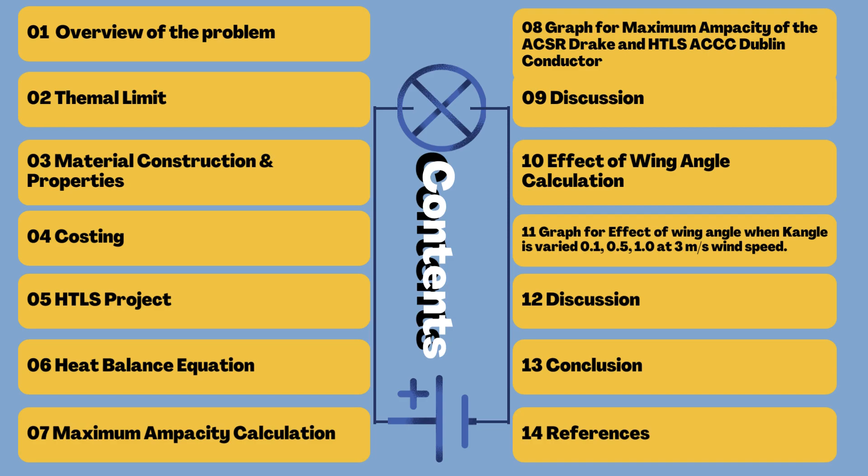As we know, electricity consumption in Malaysia is growing by around 6% annually, and this problem is straining the existing transmission and distribution infrastructure. Number two, overloading of transmission and distribution system. Expanding the transmission network has overloaded Malaysia's existing system, so the current infrastructure is struggling to manage the increased power flow to ensure reliability and stability, and there is concern about potential failures.

Number three, limitation of right of way (ROW). As we know, our country Malaysia has limited land availability and the difficulty of getting the required approvals and permission. So it is our challenge to build new transmission lines.

Okay, next I will present to you three different types of HTLS conductor available in our industry and how they are different from the ACSR conductor in terms of thermal limit, material construction, properties and costing. So for the first HTLS conductor, we choose ACCC, which stands for aluminium conductor composite core, that can operate at temperatures up to 200 degrees Celsius.

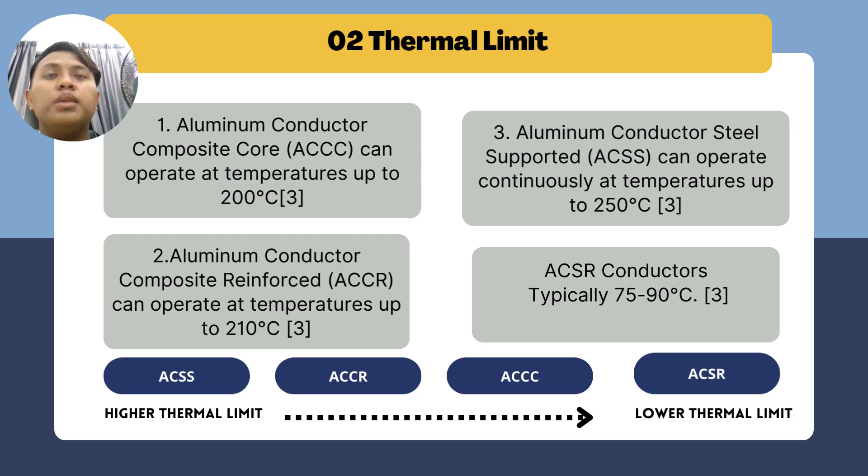So here is the ranking for each of the HTLS conductors compared to ACSR. The first is ACSS, at 250 degrees Celsius. Next is ACCR, third is ACCC, and lastly ACSR. So from this we know that ACSR has a lower thermal limit than any type of HTLS conductor.

Okay, next we will move to the material construction and properties. For the ACCC, the composite core is made from carbon fibers surrounded by a glass fiber matrix. And for the properties, ACCC has a very low coefficient of thermal expansion, so it reduces the sag at high temperature.

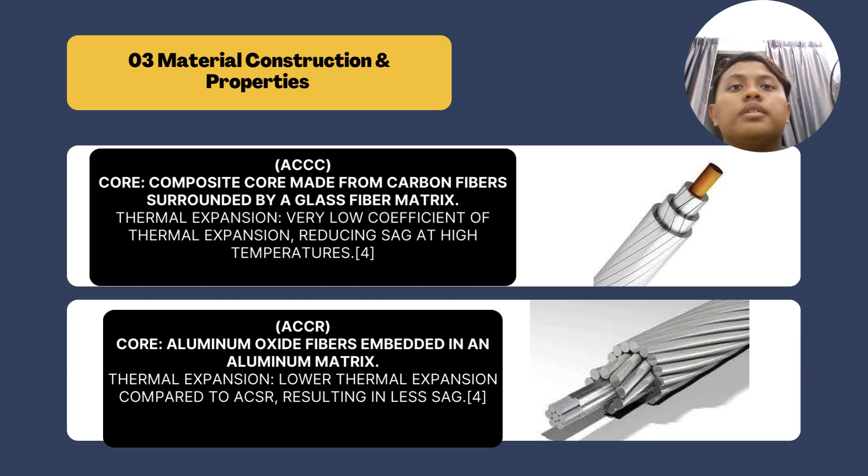Next, ACCR. The core is made of aluminium oxide fibers embedded in an aluminium matrix, and for the properties, ACCR has lower thermal expansion compared to the ACSR conductor. So this results in less sag for the ACCR. Next, we will move to the third HTLS conductor, that is ACSS. The core is made of steel similar to ACSR but with different properties. The aluminium strands are fully annealed, providing greater flexibility and resistance to thermal aging.

For the ACSR, the steel core is surrounded by aluminium strands, and for the properties, it has higher thermal expansion, which leads to more sag at high temperature, lower current capacity and higher weight.

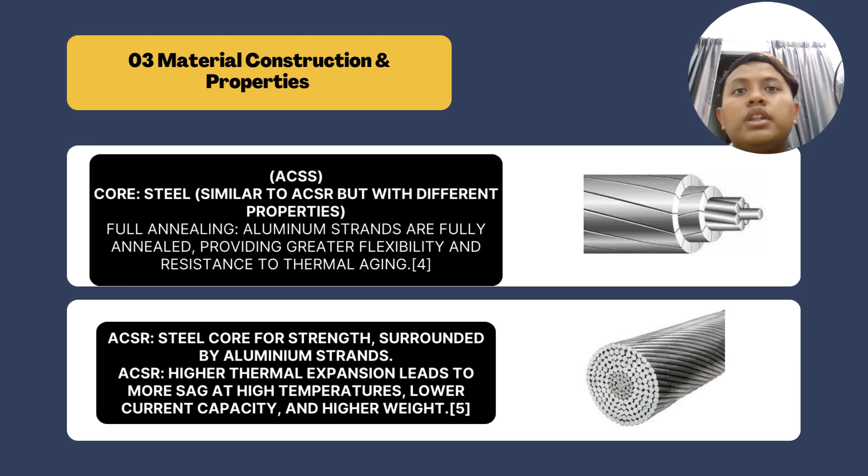Next, we will move to the costing of the three types of HTLS conductor and the ACSR conductor. For the ACCR, aluminium conductor composite reinforced, typically the range is $15 to $20 per meter. For the ACCC, the price can range from $3 to $4 per meter, for ACSS the price is from $2 to $3, and for the ACSR, $1.2 to $3.7 per meter according to the type used.

So from this we can see that ACSR has the lowest cost compared to the HTLS conductors. ACCR is in the first ranking with $15 to $20 per meter, followed by ACCC and ACSS, and the lowest cost is of course ACSR.

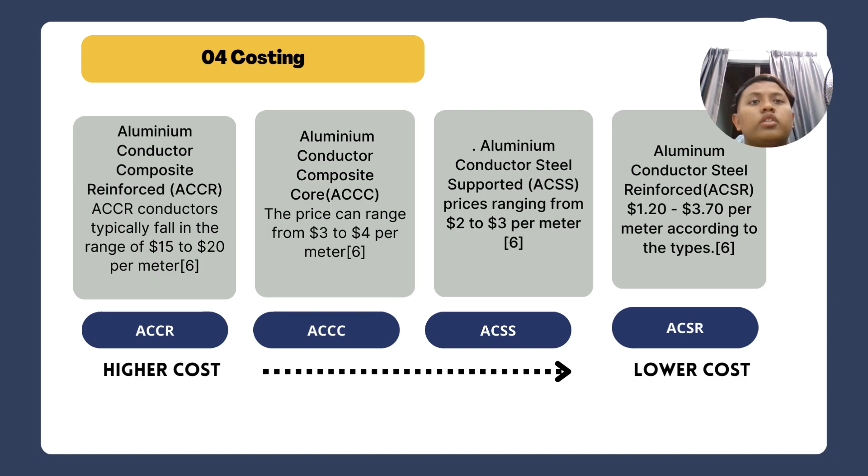So for the HTLS projects, I have chosen two: one example from our country, and one example in New England, United States. For the project in Malaysia, TNB has incorporated HTLS conductors in various projects to improve energy efficiency and transmission line capacity. One significant project involved upgrading the 275 kilovolt transmission line from Port Klang to Kapar. This conductor is used to double the line capacity without the need for new right-of-way acquisition.

And for the example of an HTLS project in the United States, the GSPL, which stands for the Granite State Power Link, is a project by National Grid to enhance power flow from Canadian renewable energy sources.

They use aluminium conductor composite core, that is ACCC, one of the types of HTLS conductor, to boost current carrying capacity with minimal sag. So it will improve the stability and efficiency in long distance power transmission. This upgrade enables better performance with reduced line losses, lower resistance and integration of renewable energy.

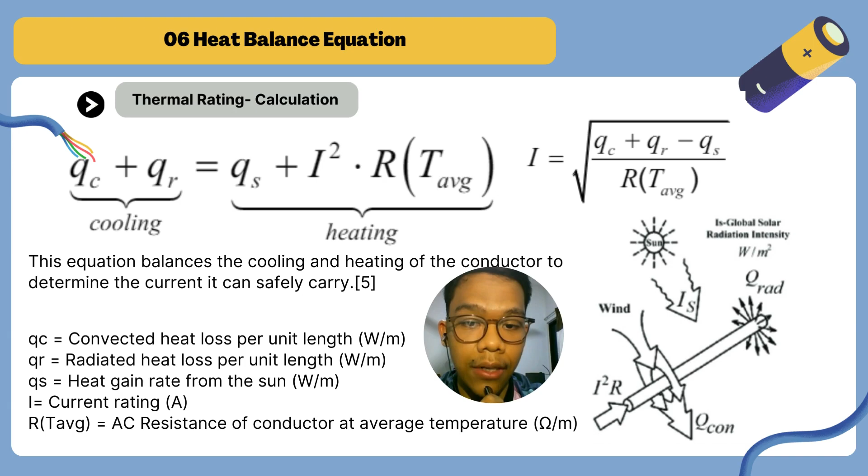Heat balance equation. First is the thermal rating calculation. This equation balances the cooling and heating of the conductor to determine the current it can safely carry. So the cooling must be equal to heating. By rearranging the equation, we can find the current I equal to the square root of QC plus QR minus QS over RT average. RT average comes from the AC resistance of the conductor at average temperature.

Second equation is convective cooling QC. QC refers to the process by which heat is transferred from a surface to a fluid. This movement of fluid carries away the heat, effectively cooling the surface. QC depends on several factors, such as the temperature difference between the surface and the fluid, the speed of the fluid movement, and the properties of the fluid.

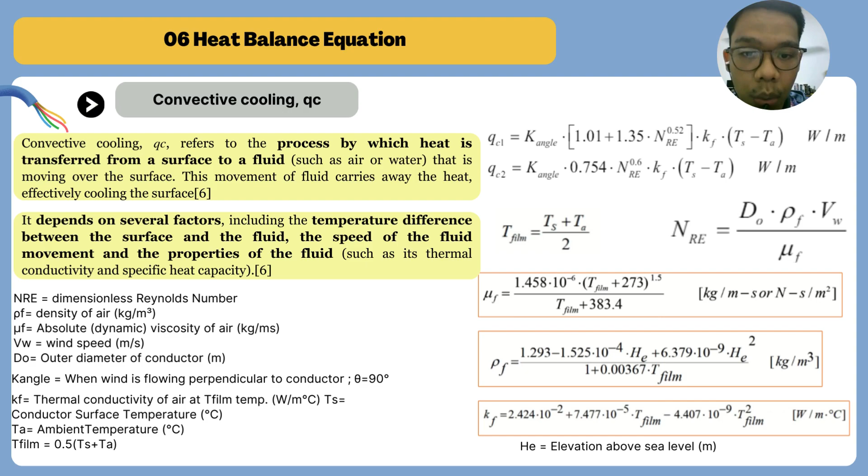To find QC, we need to calculate μF absolute dynamic viscosity, ρF density of air, KF thermal conductivity, NRe dimensionless Reynolds number, and T film. By substituting the values of the parameters, we compare which is bigger between QC1 and QC2. The bigger one will be the exact QC.

Next are radiative cooling QR and solar heating QS. So what is the difference between QR and QS? QR is radiative cooling, the process by which an object loses heat by emitting infrared radiation. All objects emit thermal radiation based on their temperature. This radiation carries energy away from the object, resulting in cooling.

And QS is solar heating, which refers to the process by which an object absorbs energy from the sun's radiation, leading to an increase in its temperature. This form of heating is driven by the sun's electromagnetic radiation, primarily in the form of visible light and ultraviolet radiation.

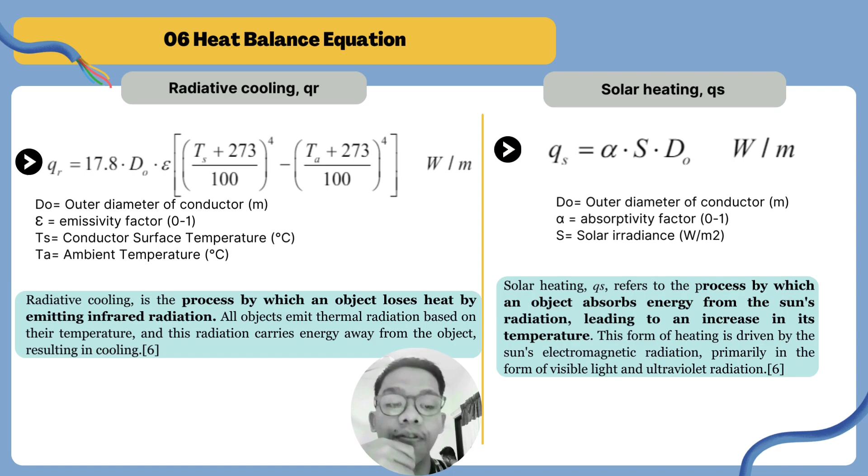Now let's move on to the maximum ampacity calculation for ACSR. First and foremost, we need to find μF. The μF value is 1.9982 times 10 to the power of negative 5, ρF 1.041, and KF 0.02871. Next, with wind speed of 1 meter per second, we need to find QC1 and QC2. Based on the calculation, QC1 is selected because QC1 is bigger than QC2.

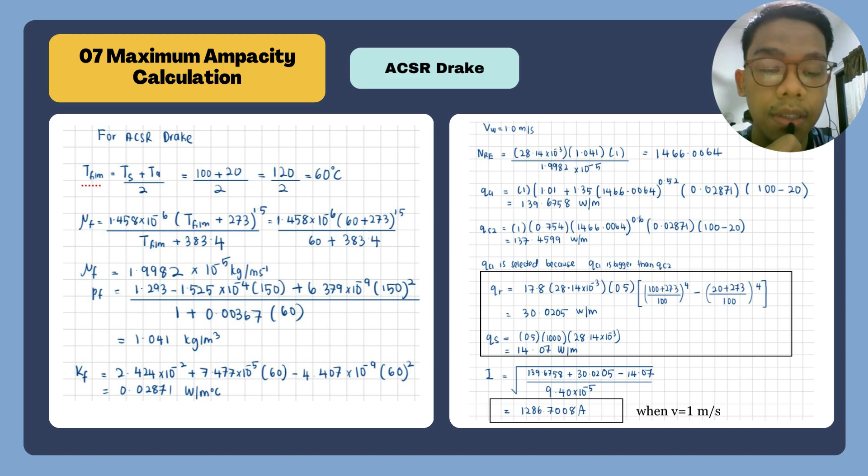Next, we find QR. By substituting the parameter values, we got 30.0205 and QS 14.07, and the ampacity current when wind speed equals 1 meter per second is 1286.7008 ampere. Next, when wind speed equals 2 meters per second, the ampacity current is 1544.7354 ampere.

When V equals 3 meters per second, 1731.0847 ampere. When wind speed equals 4 meters per second, ampacity is equal to 1878.6324 ampere. And lastly, when wind speed equals 5 meters per second, ampacity is equal to 2002.6387 ampere.

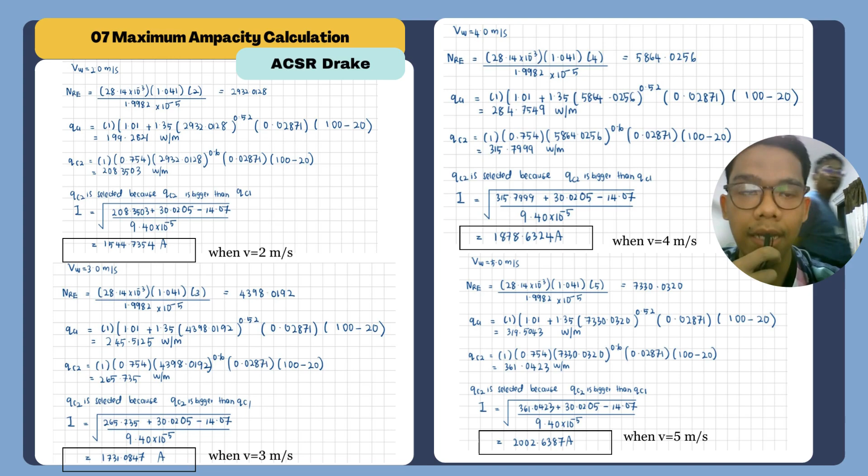So how about HTLS Dublin? For HTLS Dublin, the μF value is 2.1728 times 10 to the power of negative 5, ρF 0.9292, KF 0.0317. First and foremost, we calculated the QR and QS values. QR is 87.0067. QS is equal to 14.07.

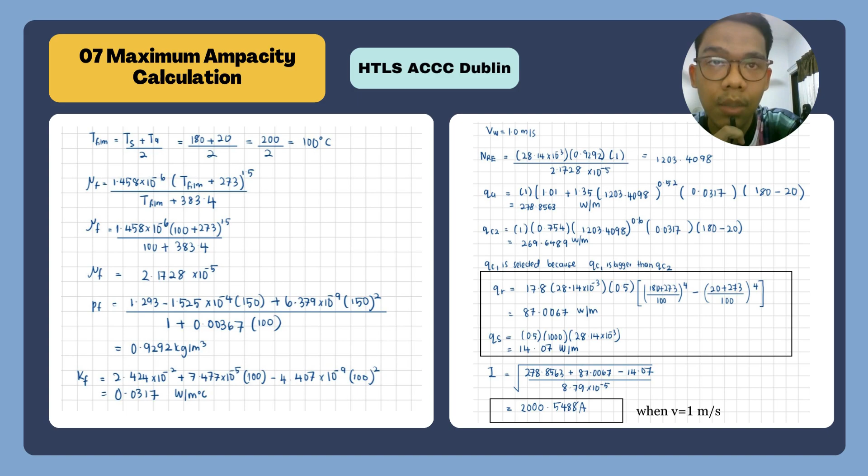When V equals 1 meter per second, QC1 and QC2 are calculated by substituting the parameter values, and it shows that QC1 is selected because QC1 is bigger than QC2. So we can directly calculate the ampacity by substituting the values. For wind speed equal to 1 meter per second, the ampacity current is 2000.5488 ampere.

By repeating the same steps, we calculate for wind speed equal to 2 meters per second, ampacity equal to 2340.8333 ampere. When wind speed equals 3 meters per second, the ampacity equals 2600.0289 ampere.

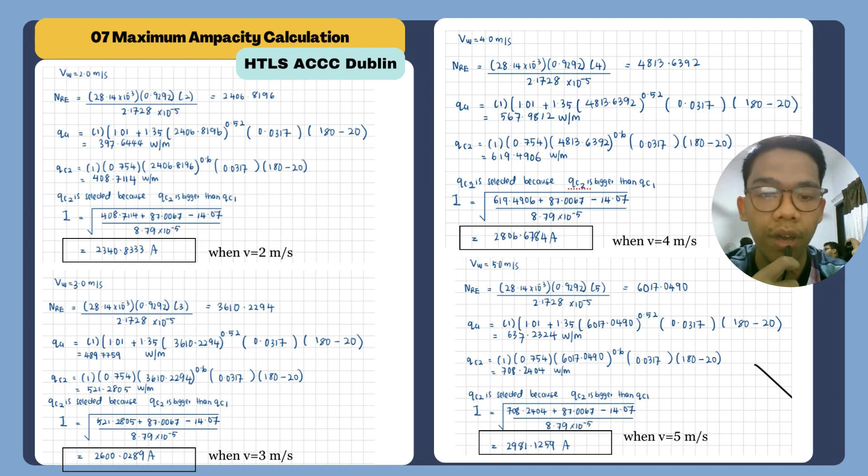When the wind speed equals 4 meters per second, the ampacity equals 2806.6784 ampere. And the last one, when wind speed equals 5 meters per second, the ampacity for HTLS Dublin is 2981.1259 ampere.

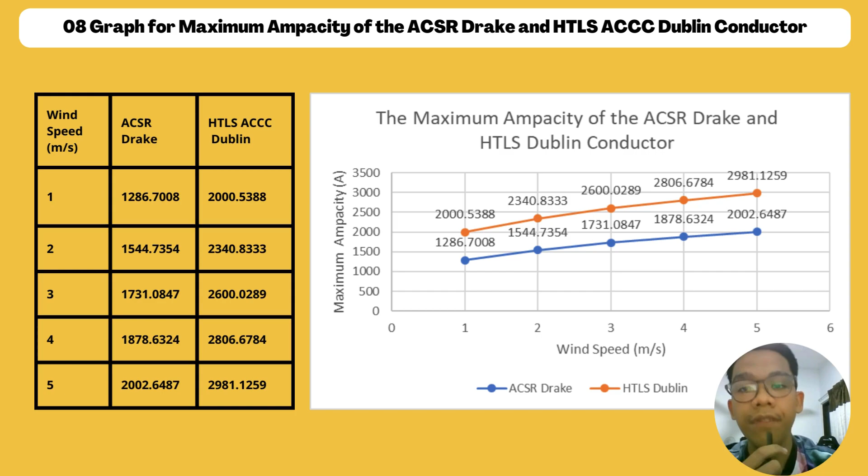Let's discuss together. From the calculation, we can determine both ACSR Drake and HTLS Dublin show an increase in current ampacity with increasing wind speed. As wind speed rises, the conductors can carry more current without overheating.

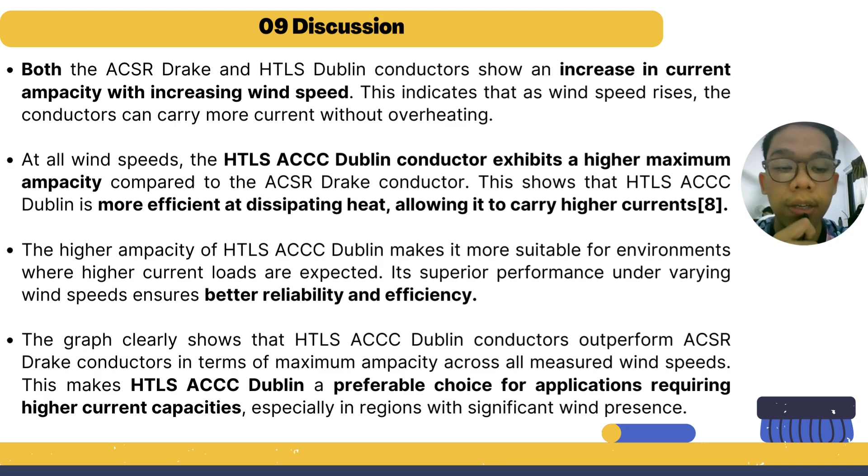From the collection of the data, the HTLS Dublin conductor exhibits a higher maximum ampacity compared to ACSR. So it shows the HTLS is more efficient at dissipating heat, allowing it to carry higher currents, and it has better reliability and efficiency. From the graph, we can conclude that HTLS Dublin is a preferable choice for applications requiring higher current capacities.

Now let's look at the effect of wind angle based on the calculation. When we talk about the wind angle, the value that's changed is the K angle, which in this case is varied from 0.1, 0.5, and 1.0. When K angle is changed, QC1 and QC2 are the only values that change.

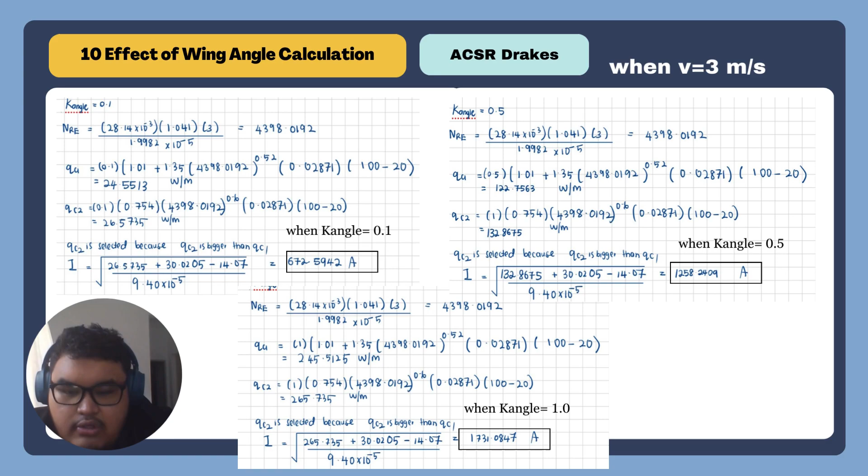That makes us choose QC2 over QC1 in the calculation. So the ampacity that we got is 1731.0847 ampere. Now, let's see the calculation for the HTLS ACCC when wind speed is constant at 3 m/s.

For K angle equal to 0.1, QC2 is greater than QC1. That makes us choose QC2 over QC1 in the calculation. So the ampacity that we got is 1192.8146 ampere. For K angle 0.5, QC2 is also greater than QC1.

That makes us choose QC2 over QC1 in the calculation. So the ampacity that we got is 1947.3453 ampere. And lastly, for K angle equal to 1.0, QC2 once again is greater than QC1. That makes us choose QC2 over QC1 in the calculation. So the ampacity that we got is 2600.0289 ampere.

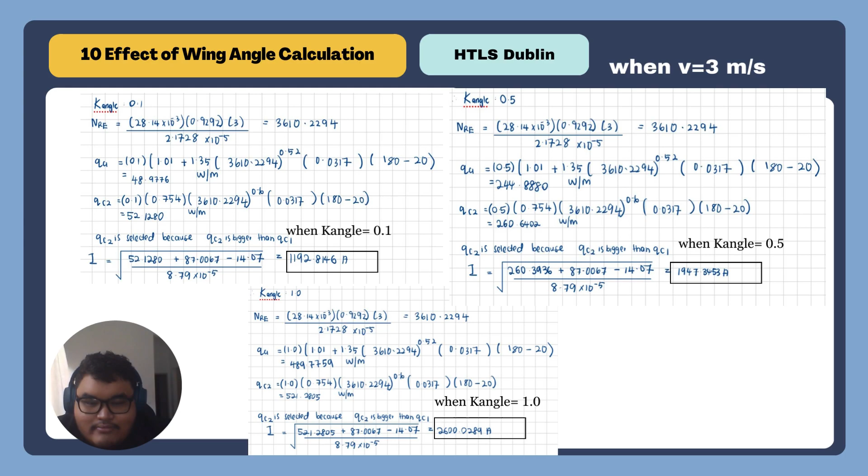Now, here is the graph for the effect of wind angle when K angle is varied from 0.1, 0.5, 1.0 at wind speed constant at 3 meters per second. Looking at the table, here are the results of the calculation we got earlier for K angle 0.1, 0.5 and 1.0.

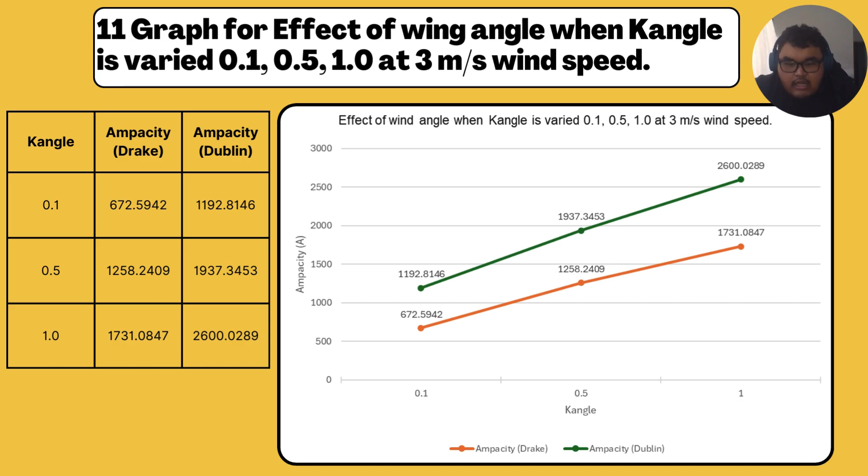In the graph, we can see that the data from the table has been plotted, and that the more perpendicular the wind angle to the conductor, the higher the ampacity, which means more power can be transmitted along the transmission line. As mentioned earlier, the ampacity value for both conductors increases when the wind angle is more parallel with the conductor, which means it has better power transmission.

This happens because the more parallel the wind angle to the conductor, the better and more consistent the airflow along the conductor. So it reduces the temperature of the conductor, which reduces the resistance and also reduces the amount of thermal sag. But overall, we can see that wind angle really does affect the performance of the transmission line: the more perpendicular the wind angle to the conductor, the better the performance of the transmission line.

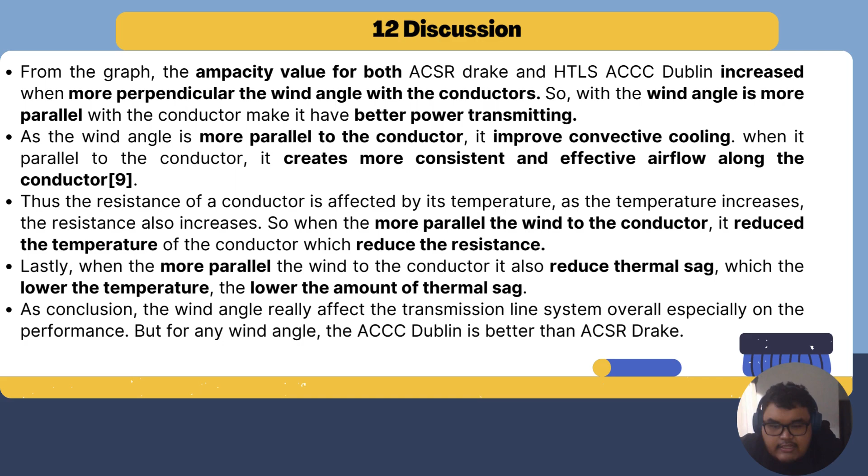But from the overall performance, we can see that HTLS is better than ACSR at any wind angle. In conclusion, HTLS is better than ACSR in overall performance. It has many advantages and potential over ACSR. For the potential, HTLS is always preferable because it has a better operating temperature that makes it last longer than ACSR. Also, by having higher ampacity than ACSR, it can transmit more power than ACSR.

For the advantages, HTLS also has lower sag at high temperature, which allows the transmission line to have longer spans. Its high operating temperature and ability to withstand extreme temperatures make it more reliable than ACSR. For the drawbacks, HTLS is not so popular because it is more expensive than ACSR. Why? Because it needs a stronger structure since it's heavier, and a more complex installation that will cost more than ACSR. And also, it is limited in the market.